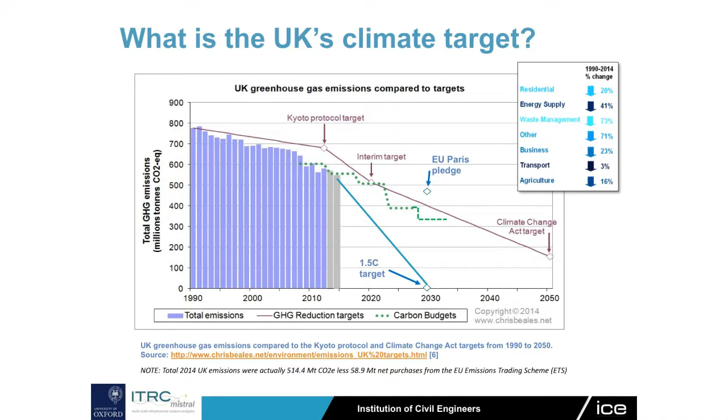Where do we have to be to meet 1.5 degrees? We have to reduce our emissions to nothing by 2030. Because it's a cumulative amount of CO2 in the atmosphere, it's the area under this graph that we have to reduce. So people are talking about overshooting, and if I have time I'll talk a little bit about the problems with overshooting and negative emissions technology, but basically that's the picture we're looking at.

What does that mean for infrastructure? Well, it means a lot. Even with 1.5 degrees, there's a lot of adaptation that needs to take place, particularly in terms of flood damage mitigation, adaptation in the UK, but also mitigation pathways are essential and must be planned, I'm going to argue, in order to minimise costs.

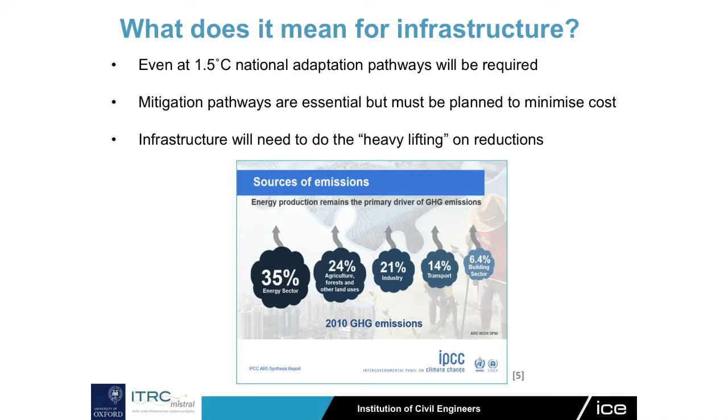You can see there, this is a bit of an old graph, but in terms of the requirements for reducing emissions, most of that has to do with infrastructure. The energy sector is a big component of it, but also transport, supplies to industry, building sector. Agriculture is a bit of a difficult one. There are things that they can do. Probably one of the best things you can do is eat less meat, but I'm not going to talk about that. I'm going to be talking about the infrastructure.

And the work that we did as part of this Infrastructure Transitions Research Consortium, it's a consortium of 7 leading universities in the UK led by the University of Oxford, where I work. We have had the good fortune of working with a number of different collaborators through the last 5 years. It's been going since 2011, and more recently with the Institution of Civil Engineers, which is the basis of this talk, the Committee on Climate Change and the National Infrastructure Commission.

The idea of the Infrastructure Transitions Research Consortium, ITRC, is that it was developing new models to look at these national scale pathways and designing national infrastructure. We built a model. That was a big part of the work that I was doing, bringing this, what I lovingly called the beast, together. We've got different sector models: energy, water, transport, digital communications.

It's called a system of systems because each one of these is a system in its own right. So there's an energy model that's geospatially disaggregated, and then it is also linked up with other models like transport and water. We look at the interdependencies and so forth. That's a complex model, but the methodology is fairly simple. We run scenarios through this system, different population, economic growth, climate change, and then we look at different strategies for meeting those different scenarios of uncertainty.

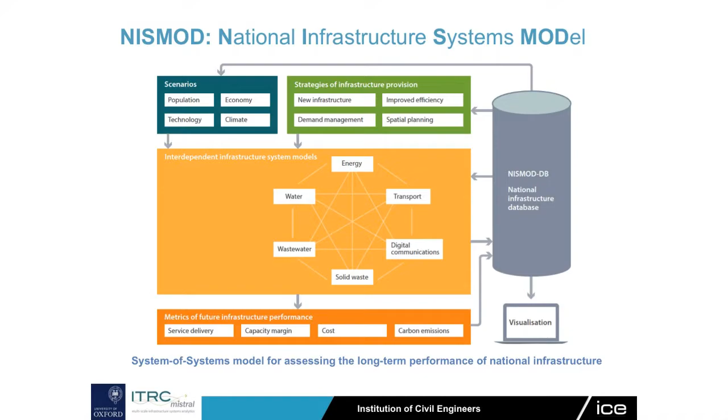And then we look at how well each of those perform based on several metrics, cost, carbon emissions and so forth. And so it was around the cost and carbon emissions that this piece of work was done. There's a database underneath it all and a whole lot of visualization, but I won't go into that detail. But in terms of the model, it is unique.

One of the reasons why we were a part of the National Needs Assessment and also working now with the National Infrastructure Commission is because we were the only ones that had this model. And one of the key things that we have is a set of socio-economic and climate scenarios that are consistent between all the different models. A bit of the frustration that the Commission has at the moment with working with the individual ministries is they all have their own models and they all run their own different population economic scenarios, and so it's very hard to look across all the different sectors. We can do that for them.

We can also look at the interdependencies between the different sectors. So a lot of the energy requirement, as Mike said, is from transport. You've got to take into account the water for cooling in terms of your water systems, for energy generation, and digital communications is really the X factor. It can change everything with Internet of Things, smart metering, remote sensing and so forth.

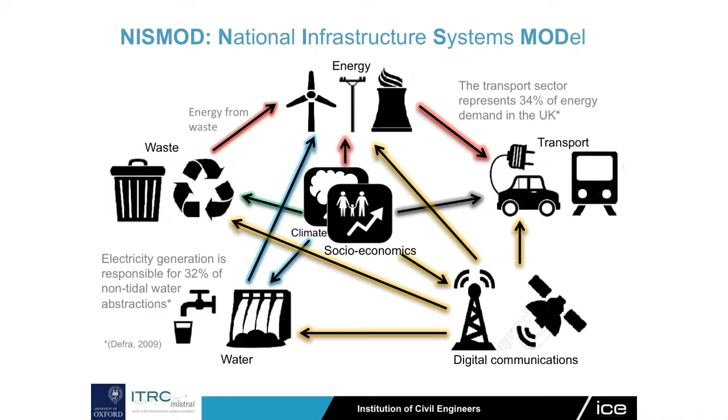So in terms of the modelling, we've modelled demands very similar to what Mike presented. You see here 2015, the levels of electricity supply and demand by the different sectors. This is high, central and low population scenarios for one particular strategy with unconstrained demand and another particular strategy with demand management, so you can see a big reduction. And that's one of the biggest differences you've seen between these two is that demand reduction. This is the gas sector. You can also see some massive differences in the gas sector, and I'll get to that.

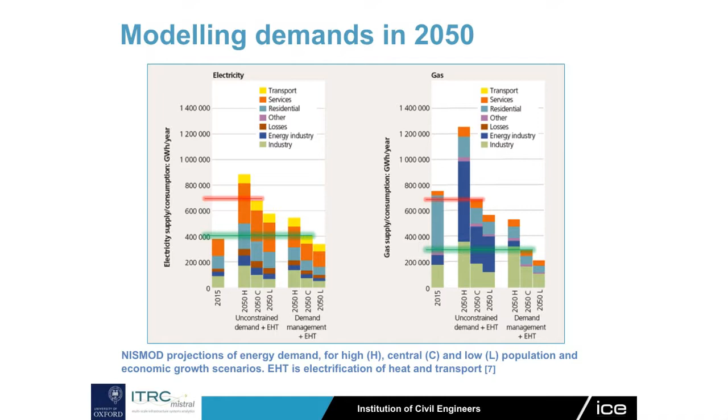So one of the most important components of our modelling work is that demand management, and that's what helps us with existing technology meet the Climate Change Act. This number isn't the same as what you saw in the other graph. Because we don't model all emissions in this system, we work with the Committee on Climate Change to work out how much we have to reduce infrastructure's emissions in order to meet the Climate Change Act. And also infrastructure has to do more than other sectors because agriculture and so forth are not expected to be able to do as much. Transport, aviation, to some extent.

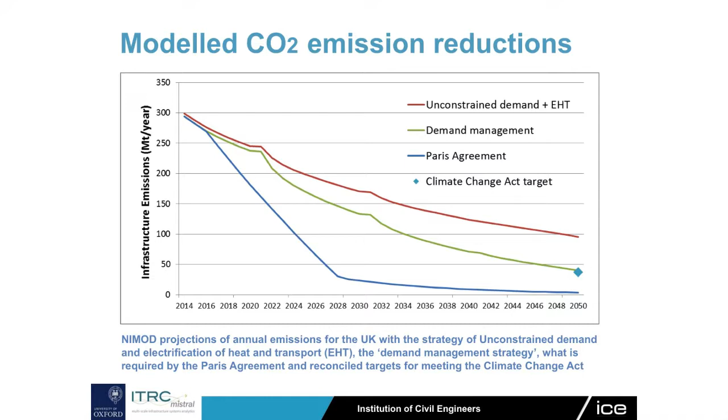So this is that unconstrained demand. This is the demand management strategy. It's not a straight line, Mike. We've got a bump in ours. That's actually the Hinkley plant, I believe. But I'll just go into the details of what that actually means in terms of the pathway.

So as I said, one of the key components is demand management. In the short term, improved insulation, and there's some fantastic technology I'm seeing here at this event. LED lighting is a big deal because you have to do something about those periods where load ramps up away from the renewables, and LEDs and lighting standards can do a lot with that. Long-term solutions are more the smart metering, and you've got to wait for those Internet of Things products to come out so that your washing machine can get a signal from the market about when the price is cheapest for it to run. So that's going to take some time for those products to get into people's households.

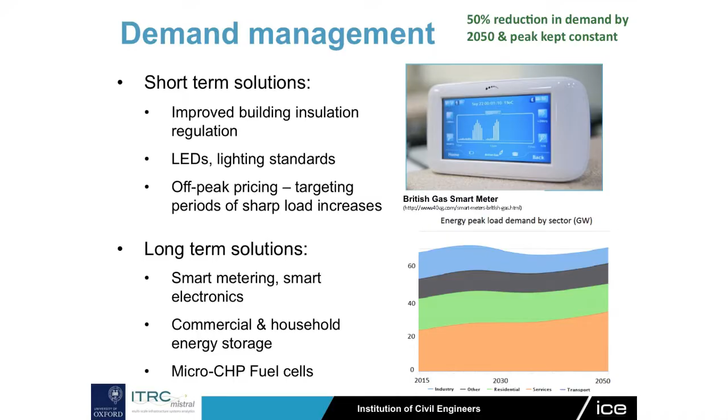This is energy demand through time, that we keep the peak demand consistent. We don't actually have a lot of information about what will happen here. Technology is going to play a huge part. What is it after LEDs? Is it bioluminescent wallpaper? Who knows? But we are doing some work now with the National Infrastructure Commission about trying to parameterise and understand some of the impacts that technology can have. In some cases, technology can actually increase demand, not necessarily reduce it. So there's some nuances to that analysis.

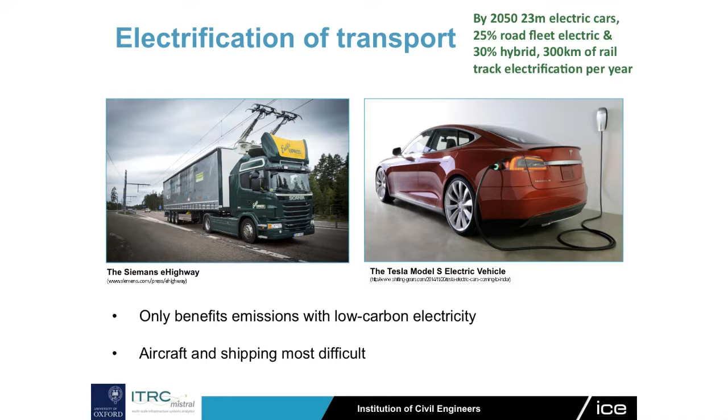Electrification of transport, we have it ramping up a fair bit. Electric cars, it's an interesting scenario. I believe Volkswagen has recently announced that they're not going to expect to make a profit within the next decade because they're investing so much in electric cars.

As you'll see a bit further down the track, there is a bit of a problem for that because at the moment, because we don't have low carbon electricity, well, not as low carbon as we need it, someone driving an electric car is actually producing more CO2 emissions than someone driving a petrol car. Petrol is actually quite efficient. But we still need early adopters and we need to move the industry in that direction if we're going to decarbonise. So thank you to those people that are taking that burden on themselves. As I said earlier, aircraft and shipping is going to be quite difficult.

Electrification of heat. My colleague in Oxford, Nick Eyre, spent a whole hour just on this one subject. It's one of the biggest issues in terms of decarbonising the energy sector, so I won't be able to go into a lot of detail. One of the key points is its peak happens at the same time as our electricity peak at the moment, and it can be up to 4 times as high. So if you convert that to electricity, that makes your peak even higher, much higher. So that's something you need to take into account.

Also, in terms of heat pumps, they are the way of the future when you decarbonise, but at the moment we're about here, and that black line is the emissions from heat pumps. You're above a gas burner at the moment because your electricity is not decarbonised. So if we're here now and we're not going to be there for another decade or two, what do you do? Do you put in heat pumps or not? So my point is we need to be planning this stuff. We need to be looking at these transitions.

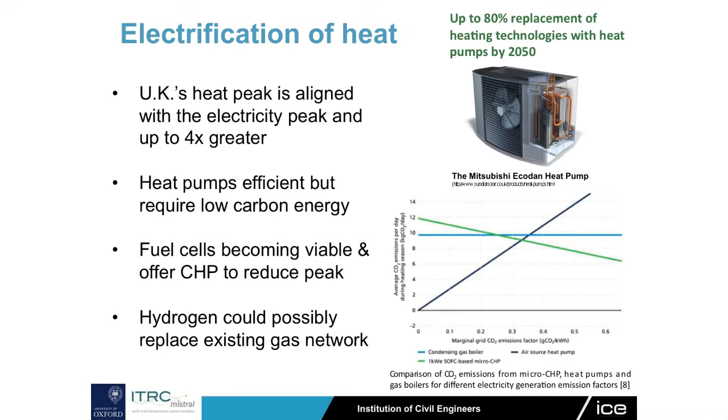Also, hydrogen is a possibility for retrofitting the existing gas network, and I'll show you why that is important a little bit later. Carbon capture and storage exists; it's a current technology. The Norwegians are doing a fair bit of it. There are existing plants in America and Canada. So it's currently operating. They assure us that it's safe and they can bury it far enough down that it won't ever come out, even if there are earthquakes. But it is a bit of an unknown, I must say, and it is quite expensive at this point.

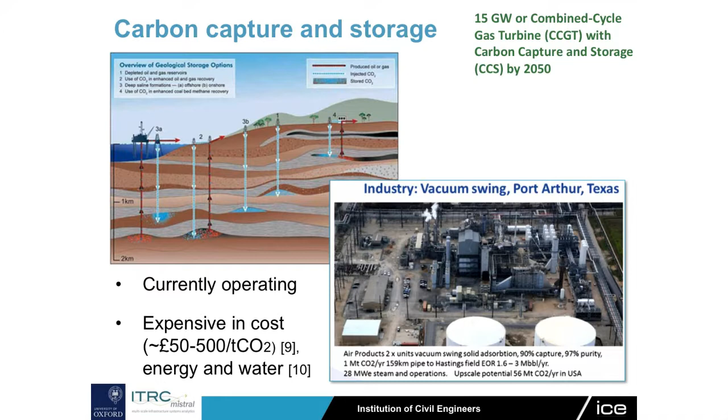Not just in terms of money, but also some of the work that one of my colleagues, Jim Hall, did with a student is looking at if you have carbon capture and storage in your energy system, you actually need more energy to pump the gas down into the ground. Because you need more energy, you also need more water. So in times of drought, in places where we've got a lot of these big fossil fuel plants, you're going to run into some trouble in terms of water demands. That gives you an idea about why we do that integration between the different sectors in our modelling.

Renewables and nuclear. I personally don't have a big problem with Hinkley Point C. I'm going to put that out there right now. Because we need dispatchable energy to solve some of the problems with renewables, and I will talk about that a bit later in terms of the energy mix. But in terms of renewables, we do conceivably have enough energy to meet the demands by 2050. It'll require us taking up a lot of the North Sea with offshore wind, as Mike said. Also, a fair bit of space on the ground in terms of solar. And tidal is a fantastic option, but I won't go into too much detail there. Michael's already done some of that detail.

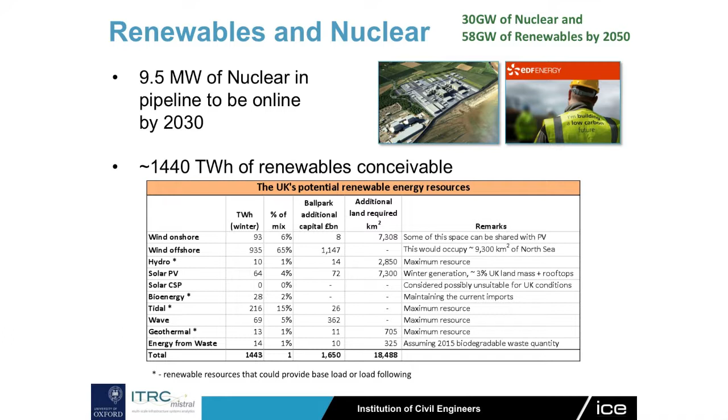Now on to the right energy mix. This happened on October 5th last year; to me it looks like a picture out of a Michael Bay Transformers film or something like that. That's a cyclone. They're usually called tropical cyclones. The tropics are up there. So to me, I mean, it's a 1 in 50 year event, they say, but for me that's quite striking. What happened was this cyclone came through and hit South Australia.

They were getting up to about 40% of their energy from wind at the time because the turbines were flying like crazy, until they got to the point where the winds were going too strong. Up to 100 kilometres an hour, the wind power had to switch off, and so a much bigger load came from an interconnector with Victoria, which was using a brown coal power plant. The winds then knocked down a couple of high voltage transmission lines, overloaded the interconnector, then all of a sudden the whole state's in blackout.

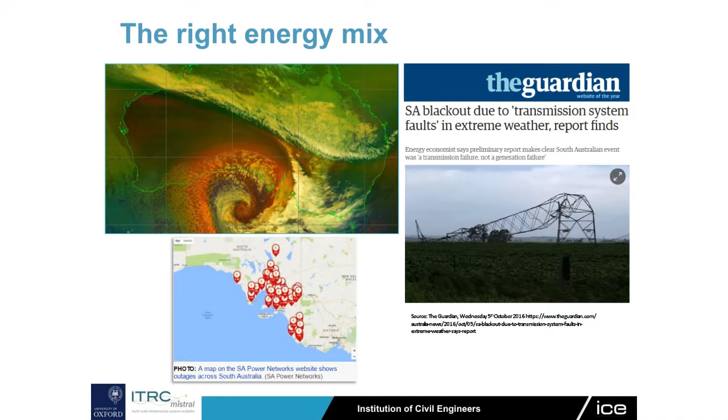The now Prime Minister of Australia, it's hard to keep up, I realise that, got into a bit of trouble for blaming renewables for this, and he copped quite a bit of flack from the renewable energy sector, but he did have a point to some degree, that you do actually need that energy mix in order to deal with situations like that.

It doesn't really matter in terms of our modelling from what we've seen in terms of how you do that energy mix. The previous Australian Prime Minister, it's hard to keep up, I know, once said that coal is good for humanity. He got that wrong, obviously, but the only thing he really got wrong was the tense. Coal was good for humanity, it's not anymore. And so in all of our modelling, we phase out coal.

But what you see, the difference between these two strategies, they have the same cost, the same outcome in terms of emissions. This one has more nuclear, this one has more gas turbine with carbon capture and storage. It doesn't really matter a lot to our modelling which one you choose, so that's up to what you believe is the best bet, really.

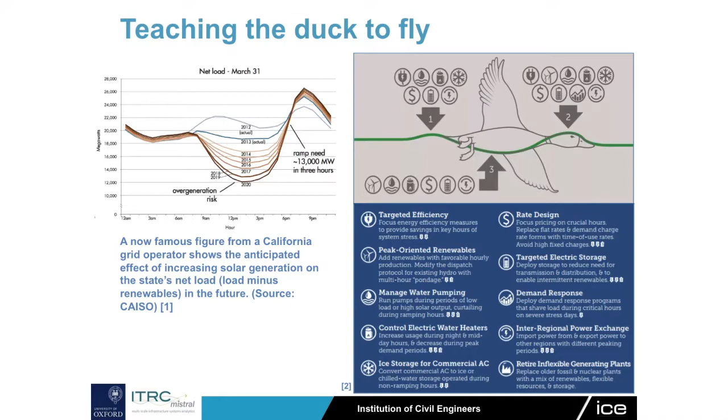On a national scale, which is where we do our modelling, some of the key points are putting in renewables strategically, so they give you the power when you need it, not necessarily when you're maximising profit. A lot of the situation at the moment is people are putting wind turbines where it maximises profit, but that's not necessarily where you need the energy the most. So you need the bigger picture. Also getting people like the water industry, wastewater industry, to do a lot of their demand at off-peak hours and so forth. It's a very good article if you have the time to have a look into that.

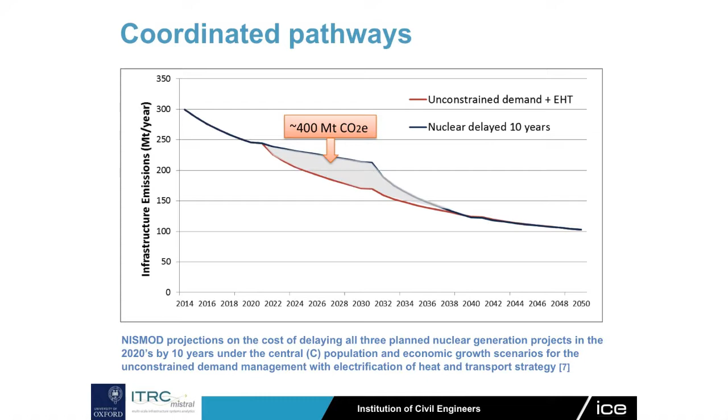So in conclusion, may you be born in interesting times. You definitely are in interesting times. There's a lot of work that we need to get done. I think it's very important that we get the energy mix right if we are going to meet what they're calling the energy trilemma, keeping energy affordable, sustainable and reliable. And I believe that national planning, and I hope I've shown that, and coordination is essential to that.

We wrote a paper on this that a lot of this work came from. We also help with the national needs assessment if you have more questions apart from what you hear today.